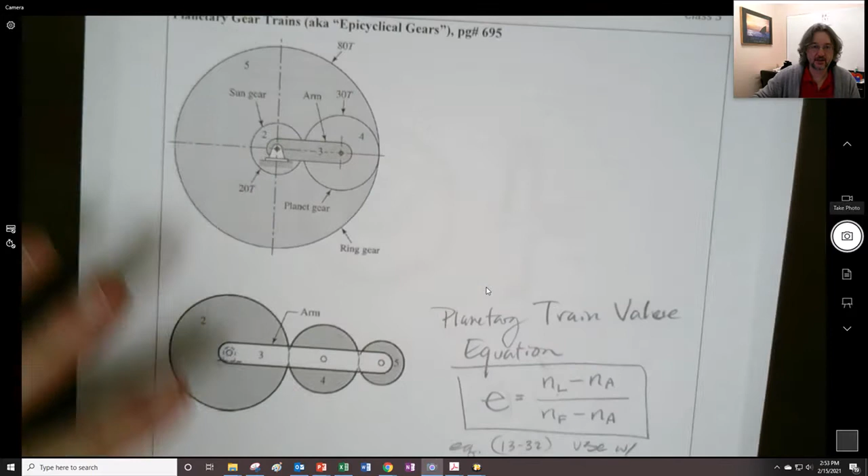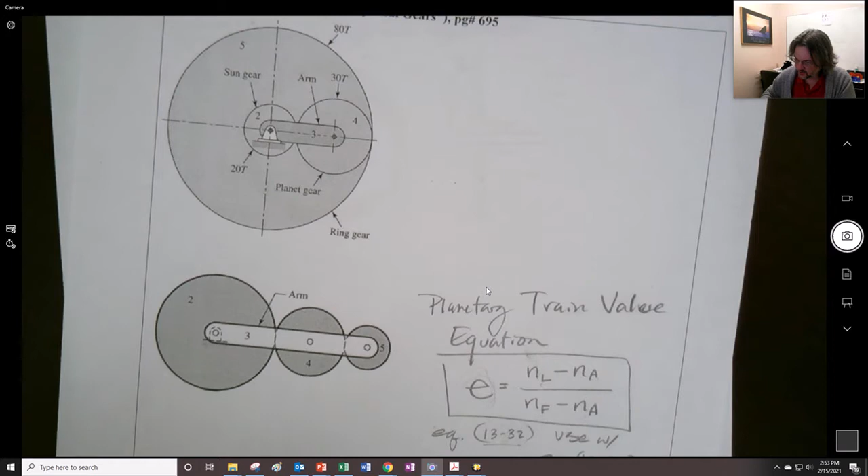This is a continuation of Class 5 in ME470, where we were talking about planetary gears. I want to go through a simple example that's available in Norton's book, Design of Machinery. I think it's a useful example to go through.

For the planetary gears shown, find the output speed and direction if the arm is the input at 1000 RPM clockwise, the ring is fixed, and the sun is the output.

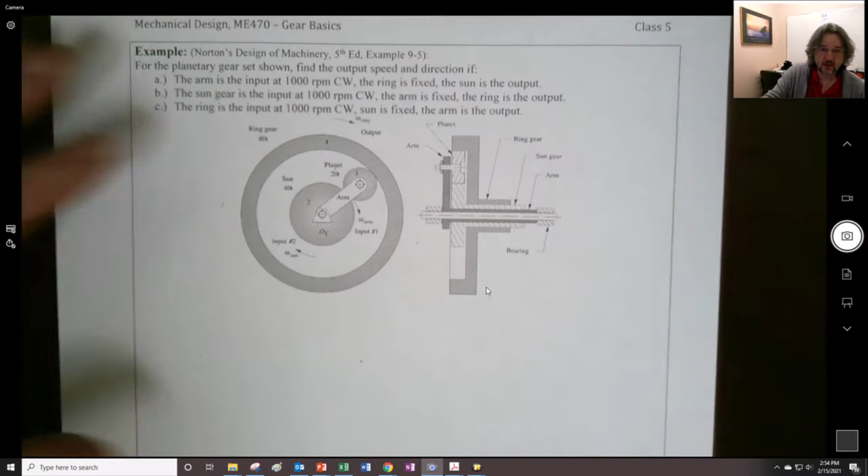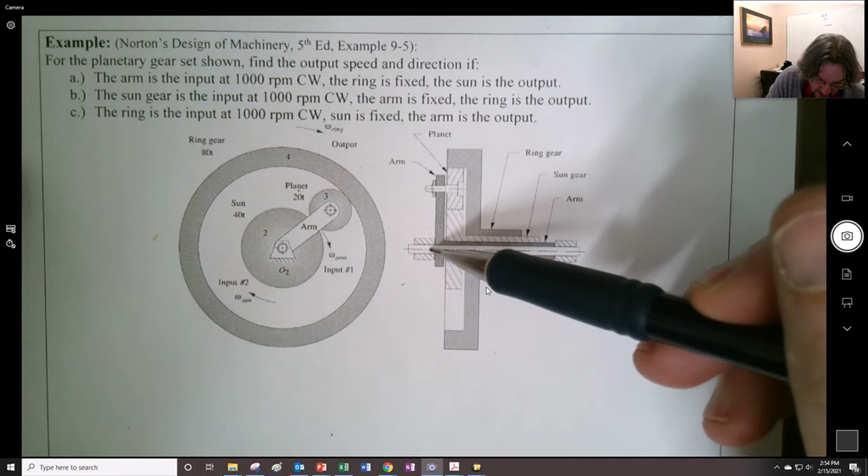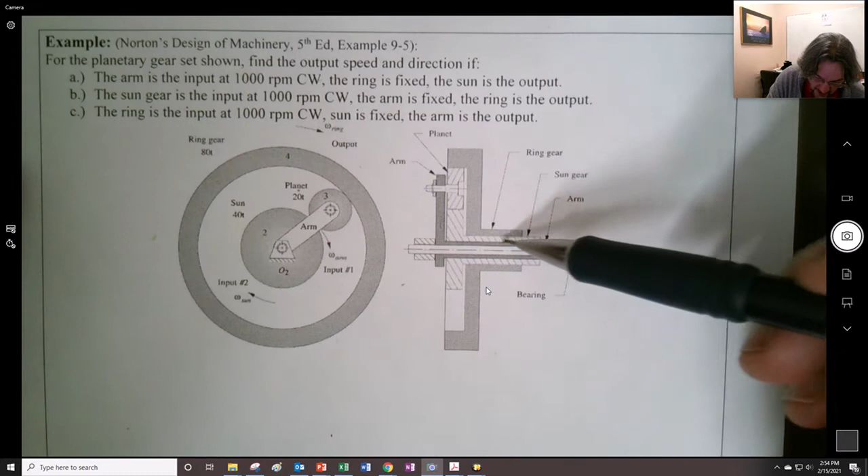What they're showing here, you need to look at carefully. You have a shaft connected to this arm - this is the arm shaft, this is the sun shaft, and this is the ring shaft. Any of those three could be connected to something externally.

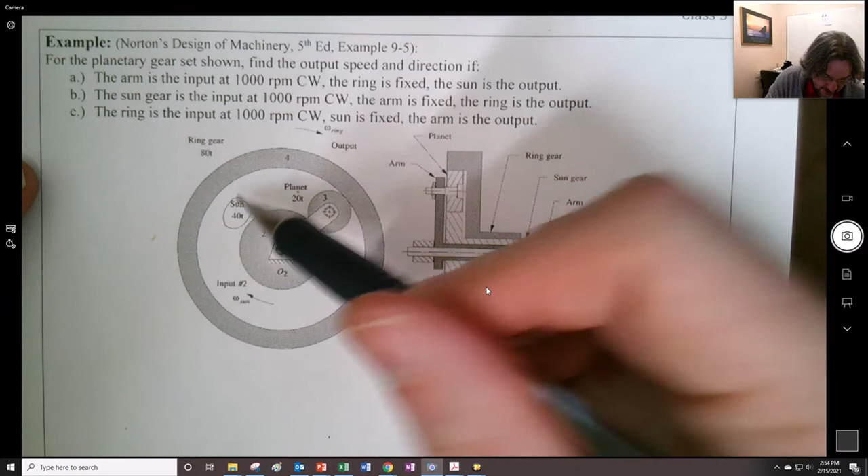In terms of teeth, we have 40 sun teeth, 20 planet teeth, and 80 ring teeth. Just as you did previously, you want to check these are compatible with each other. First off, they all have to have the same pitch, so the number of teeth is proportional to the diameter, or the radius.

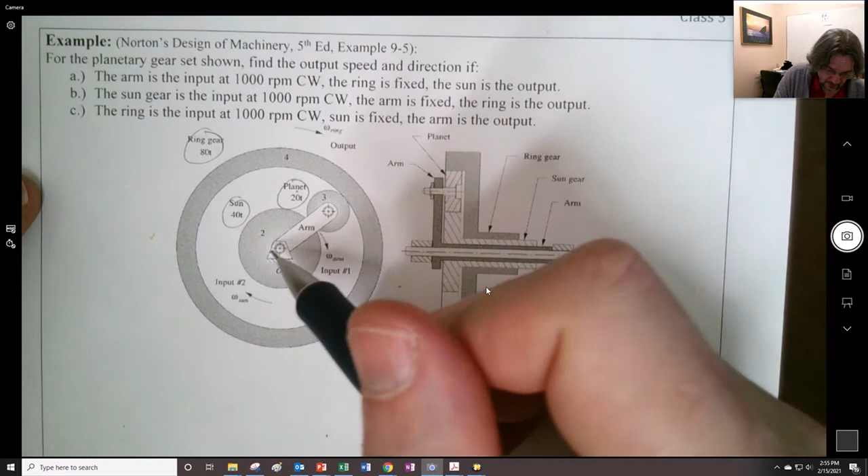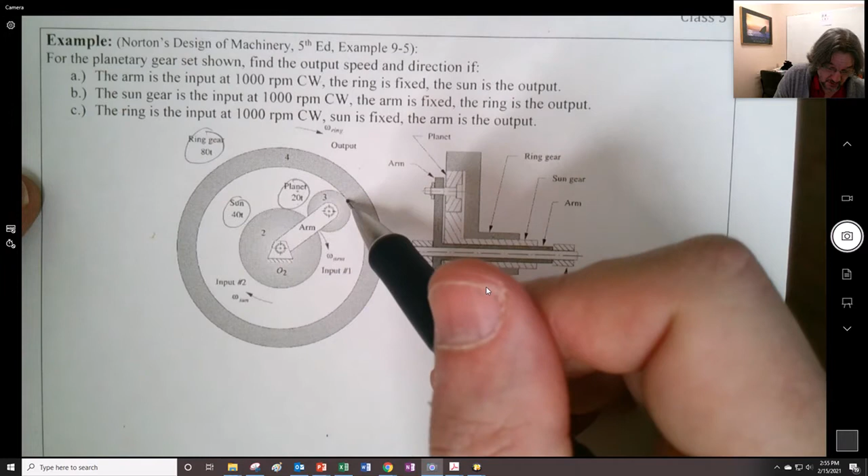You have 40 teeth here. So let's say there's 20 in terms of the radius, plus another 20 right here - 20 and 20. And right here, half of this is 40. So you could see these will work together. That combination has to exist.

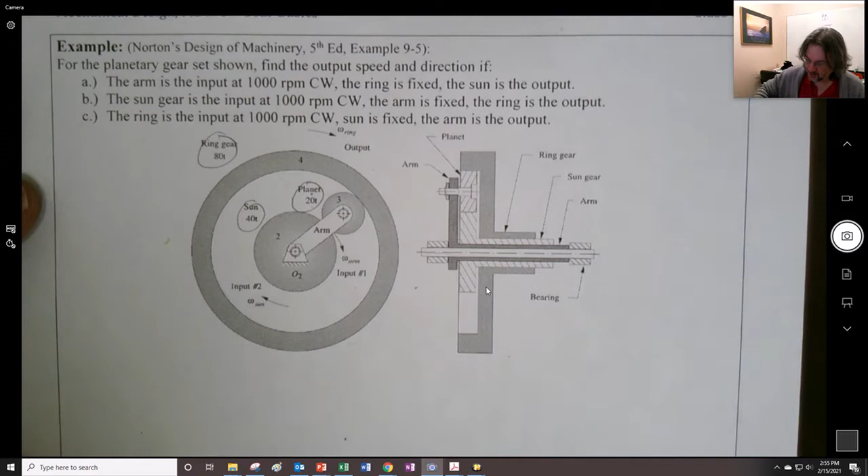What we have to do here is take the E value. Now we don't have to go in the order in which it's stated - this E value will be valid for whatever combination you choose.

I like to think of the sun as the traditional input, and let's say the ring is the output. Let's pretend the arm is stationary, because we're just looking at teeth for the gear train. So right here we could say number 2 drives number 3 - N2 drives N3.

Then we could take a look at this. We can see that N3 drives N4.

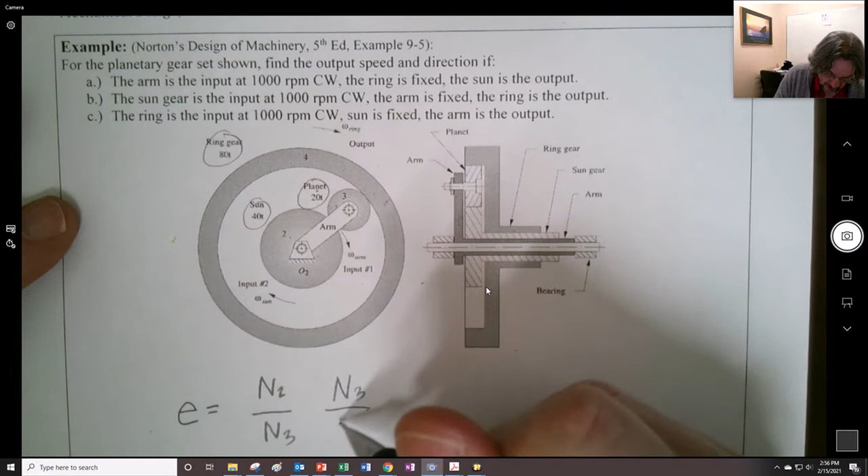Now you have to be careful here, because here's where a trap is. In the previous gear train, we said each stage is negative. That's not necessarily true if there's an internal gear. So we could try to memorize that, or do what's generally recommended.

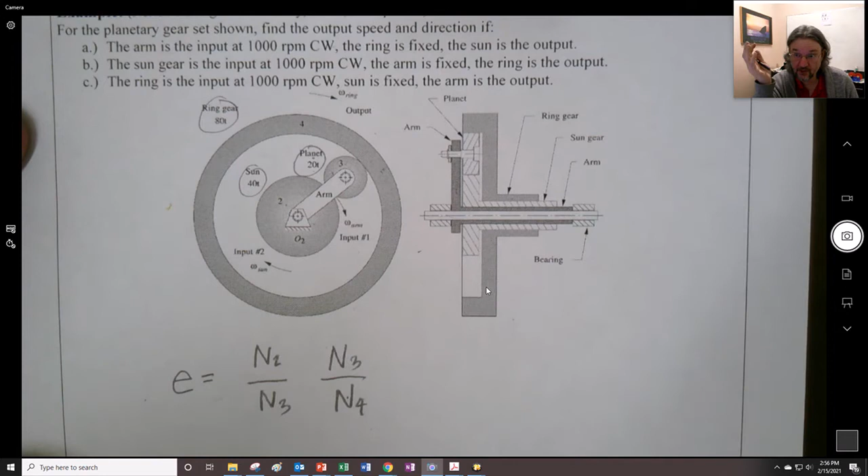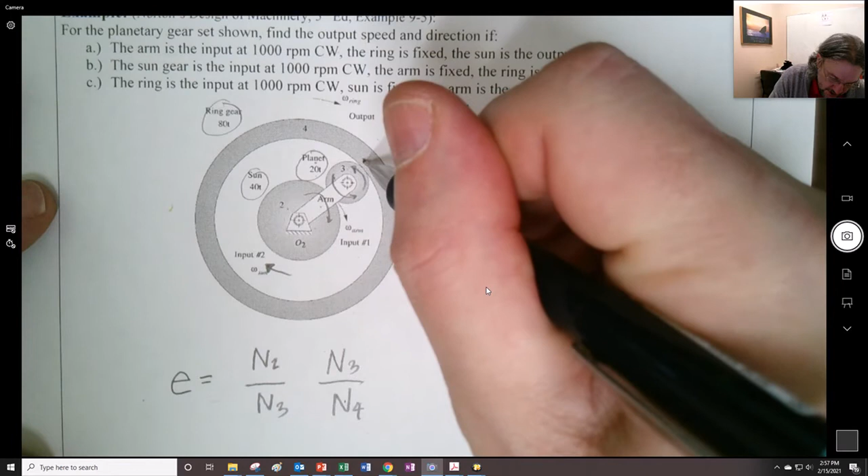If you want to figure out whether the input and output will be positive or negative, hold the arm stationary and find which direction this will go. If you move the sun in that direction, clockwise, this would be clockwise, and then this would have to be counterclockwise. So over here, that would force the ring to go upwards.

Does that make sense? It couldn't go backwards - this couldn't go counterclockwise and that go clockwise. The teeth would break off. By this one going counterclockwise, it makes that one go counterclockwise.

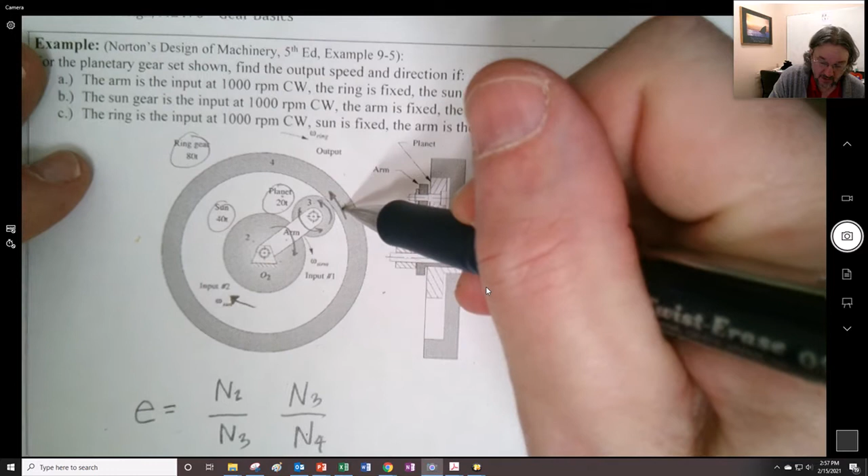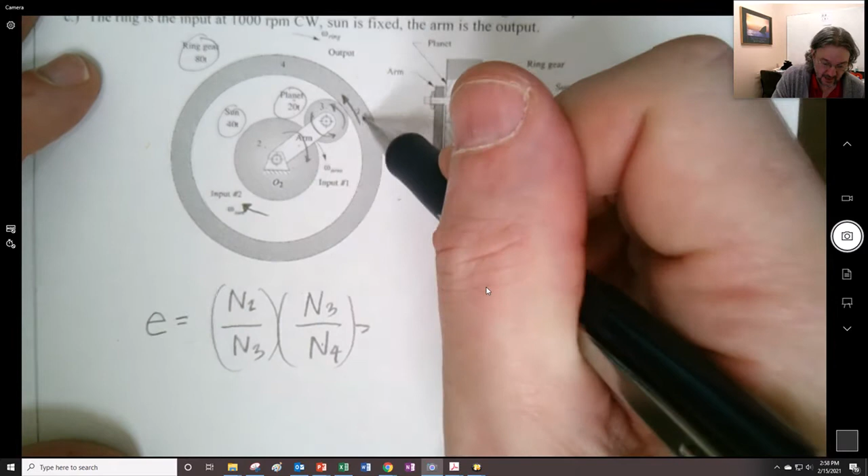So when we're taking a look at whether this should be positive or negative, this whole thing is going clockwise and the output is going counterclockwise. Therefore, the whole thing is negative - not the same as previously, where each stage reverses direction. That's because of the nature of this internal tooth gear.

Similar to our little trainer thing right here. Once again, we could say make the planet fixed right here - so the planet would be fixed somehow. Planet's fixed.

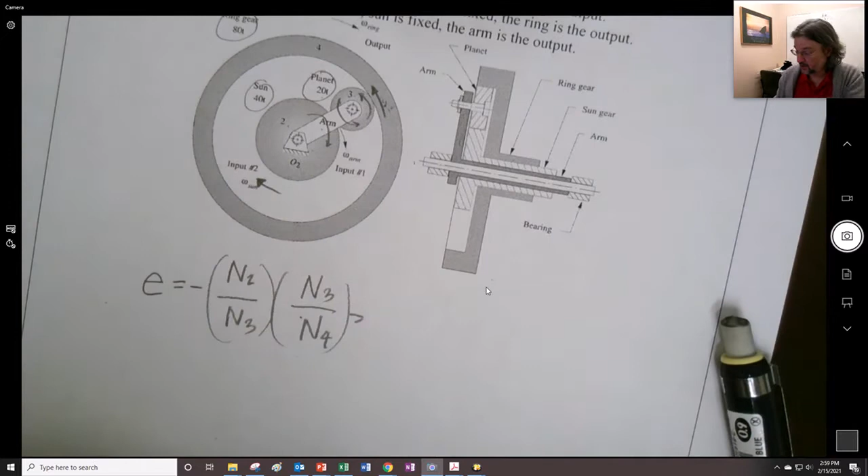Input gear, input sun right here, makes the output go counterclockwise. So in this configuration, we've figured that out. Now we can have more complicated things than what we've seen here, so we have to be on the lookout for more complicated configurations. Not necessarily would it always be this way, so we have to think our way through and see which direction the overall gear train goes.

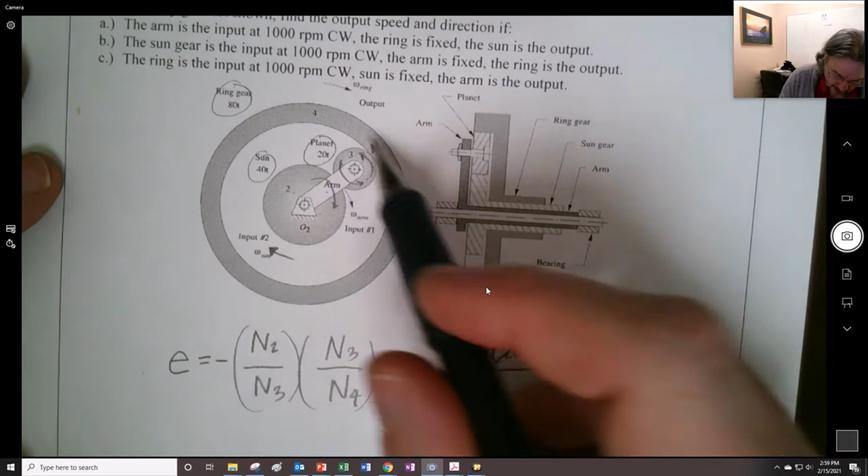So as part of that, I'll make that negative, and the gear teeth driving right here is 40. This is 20. But we also notice this is going to be driven, and gets driven down here, so those are actually canceling each other out. So this is 80. The overall gear train ratio is negative 0.5.

Now we're going to use that with the equation: NL minus NA, divided by NF minus NA.

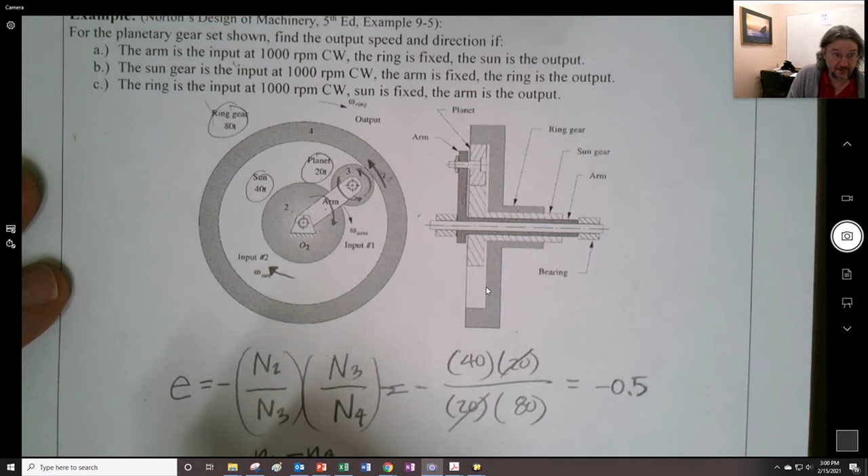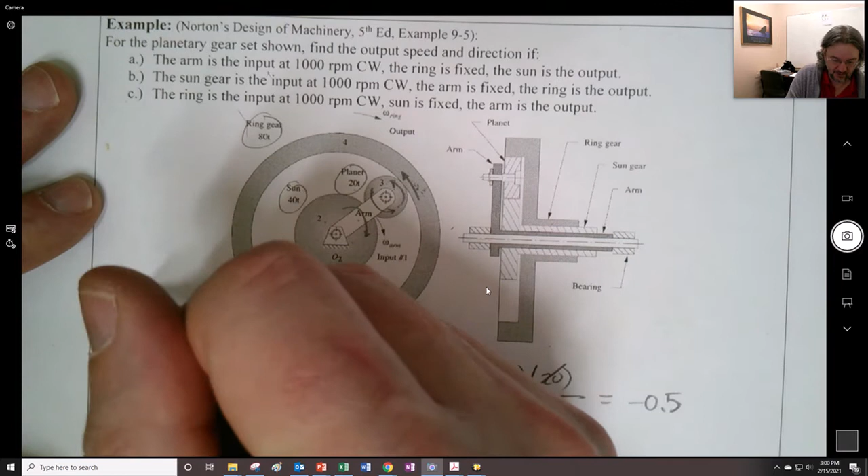In the first scenario we're describing, the arm is the input, and it goes at 1,000 RPM clockwise. So NA is 1,000 RPM. I'm almost tempted to make it negative, but I recognize I'd get the opposite of what I want, so I'm going to treat clockwise as positive, just for this time.

And the ring is fixed, so the ring in this case is the last. We'll say NL is equal to 0. And we want to find the sun, which is the output, so that's the first, the thing we're going to try to find.

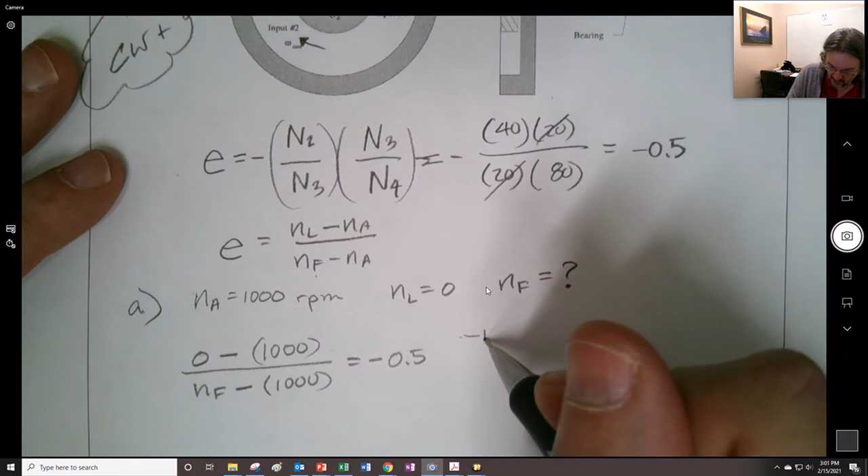So plugging into the equation: if the last is 0, the arm is 1,000, the first is the thing we want to find, and the arm is 1,000, and that equals negative 0.5. Working the math, negative 1,000 divided by negative 0.5 equals the first minus 1,000, and I find that the first is going to be 3,000 RPM clockwise. So we have like a 3-to-1 ratio here.

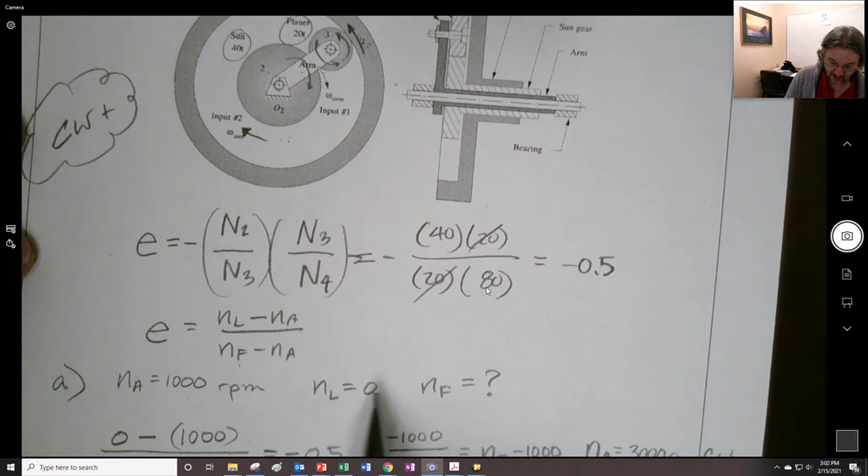In this configuration, if the arm is used as the input, we make the sun go 3 times as fast, because the ring is fixed here. That's pretty cool.

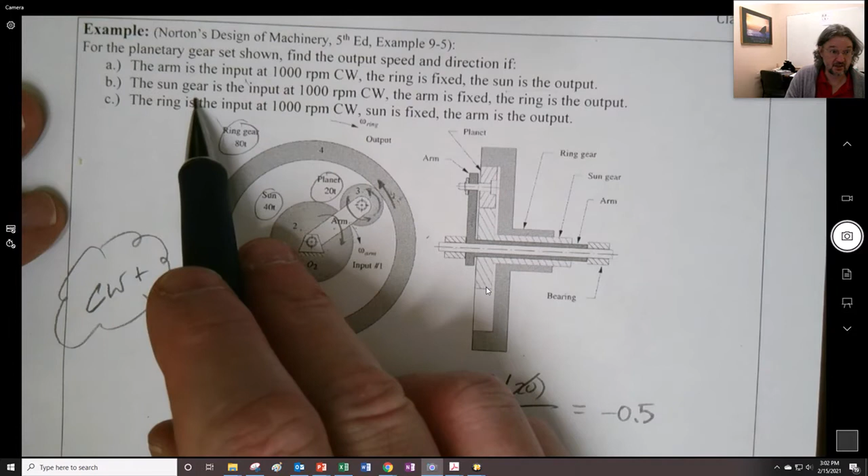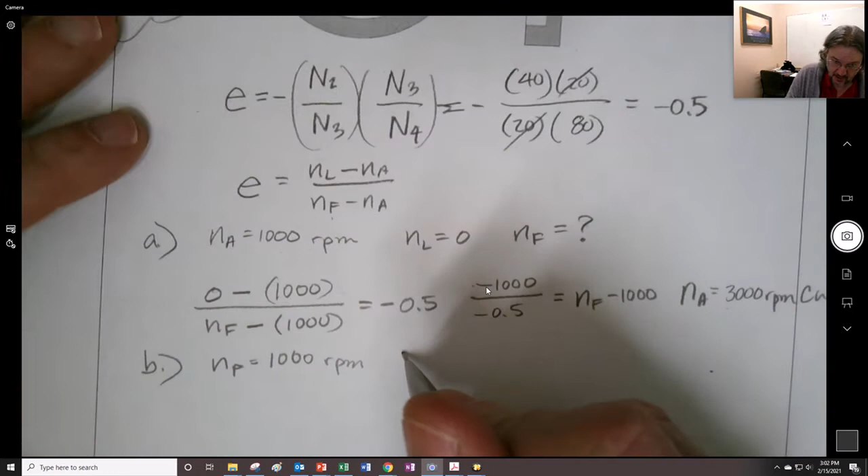In the second configuration, the sun gear is the input at 1,000 RPM. So for us that's the first. nF is equal to 1,000 RPM. The arm is fixed, so NA is equal to 0. And then the ring is the output, so NL is equal to who knows what.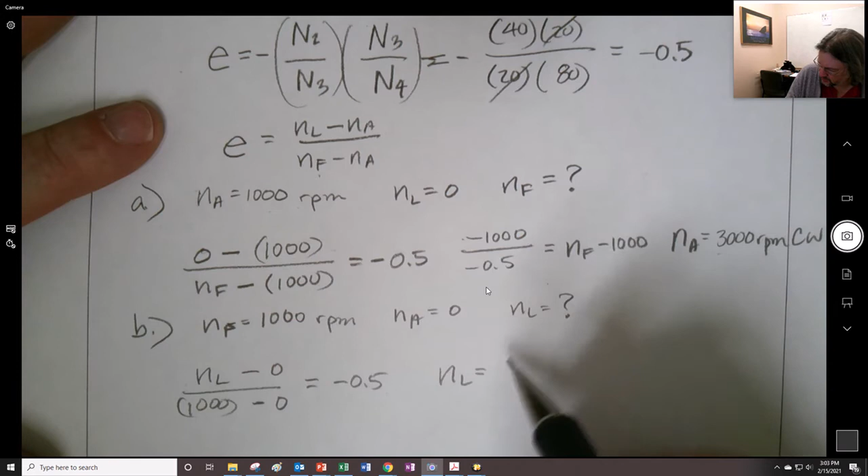Putting this back into the equation: the last is NL minus 0, divided by the first, which should be F, 1,000, minus 0, and that equals negative 0.5. So we get NL, not too hard to do, equals negative 500 RPM, or 500 RPM counterclockwise. That's the reversing we experienced before when we fixed the arm.

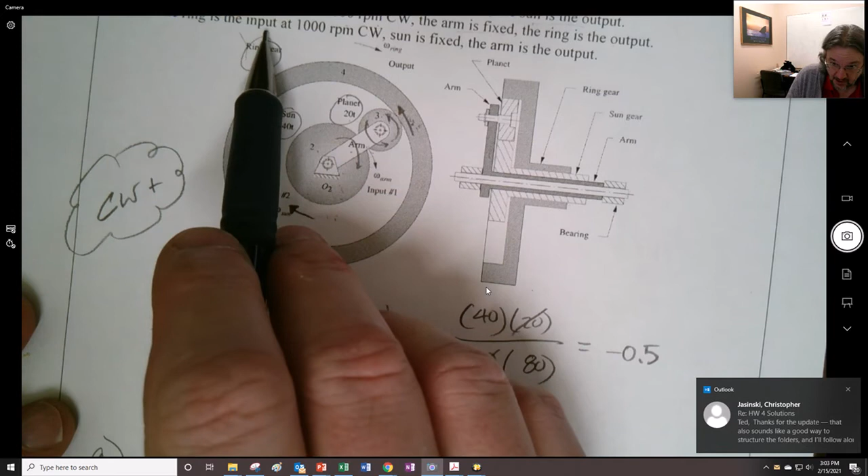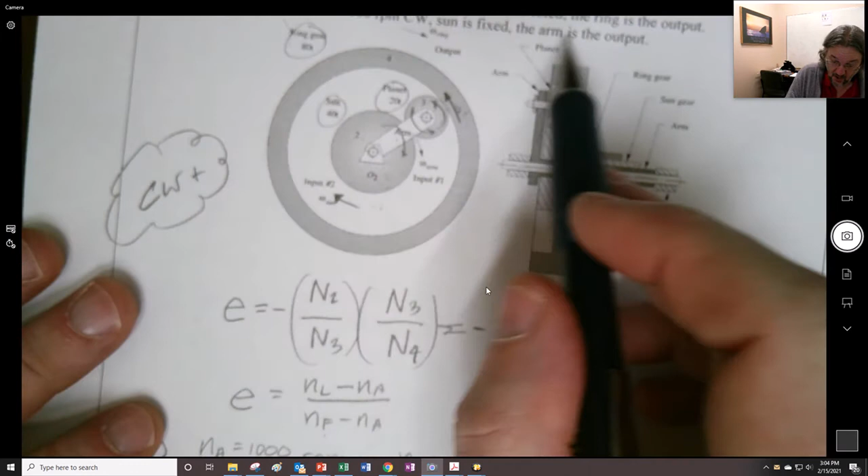C is part of this: the ring is the input at 1,000 RPM clockwise, the sun is fixed, and the arm is the output. So the ring is the last, NL equals 1,000 RPM clockwise. The sun is fixed, so that's the first, NF is equal to 0, and the arm is the output, which is the unknown.

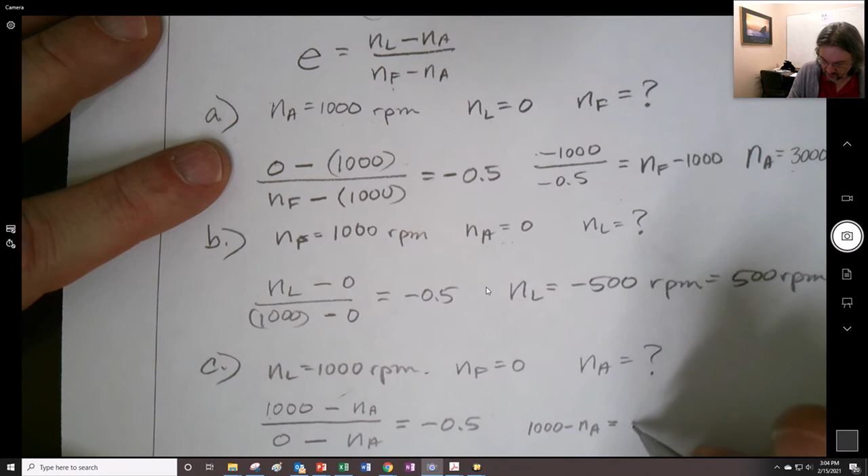Coming back to the equation, we have 1,000 minus NA, divided by 0 minus NA, equal to negative 0.5. Working that out with a little algebra, I can put those over to the side, multiply by 0.5 NA, and I find that NA is equal to 666.7 RPM, and it comes out positive, so we know it's clockwise.

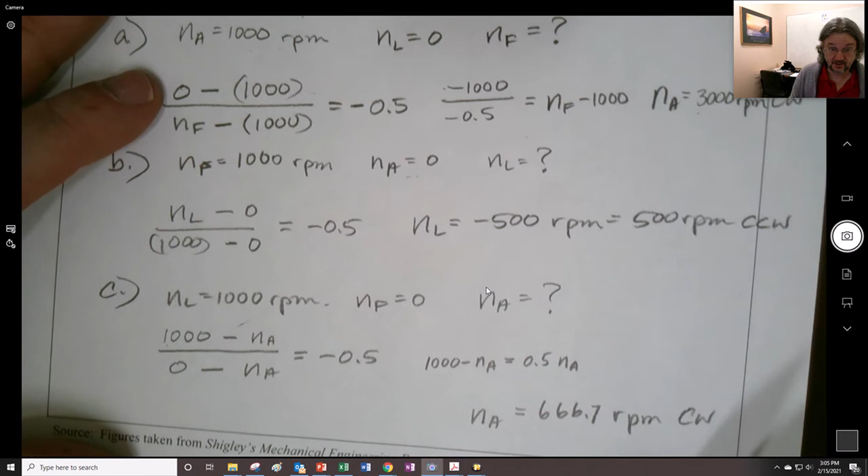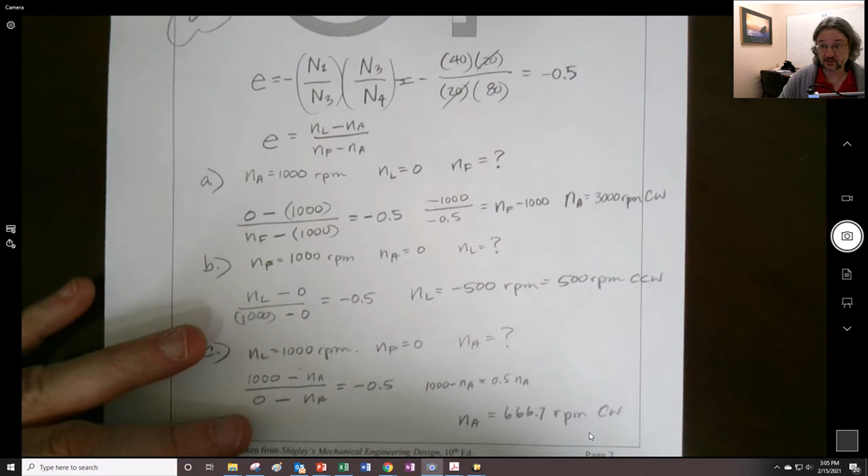That's what happens in this configuration. That's the method by which we establish the relationship between the input and output of a planetary gear. For more complicated problems, we just use that same approach, but adapt it to the scenario. Hopefully that's helpful. And that's a 12-minute video.